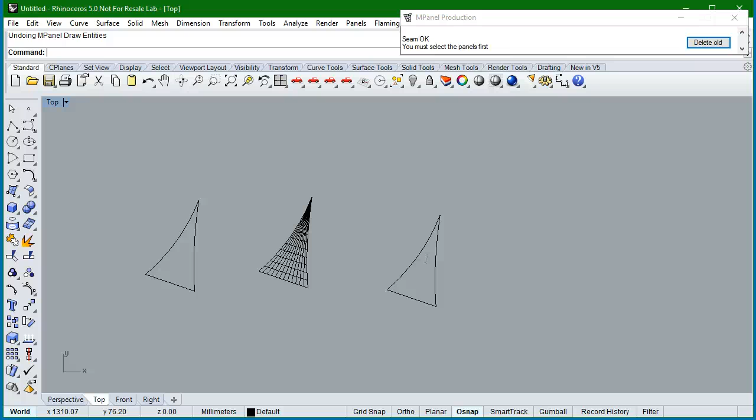This video is to look at panel truncation or seaming truncation, where the seam is truncated on the corners, and this has particular use on panels like these triangular panels which have a sharp pointy end.

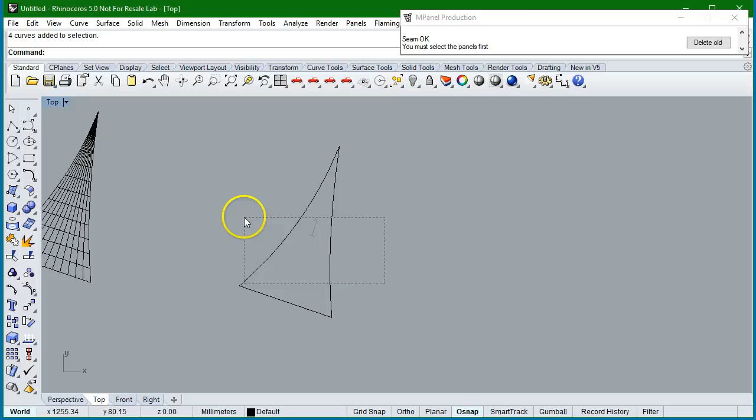If I add a seam allowance to that with no truncation, so this is just a normal seam allowance, we get an extension of the end here due to the seam allowance, which can waste fabric and can be difficult to handle in production.

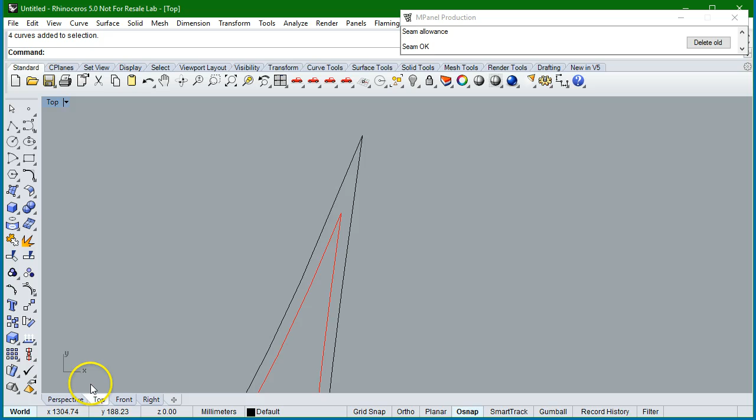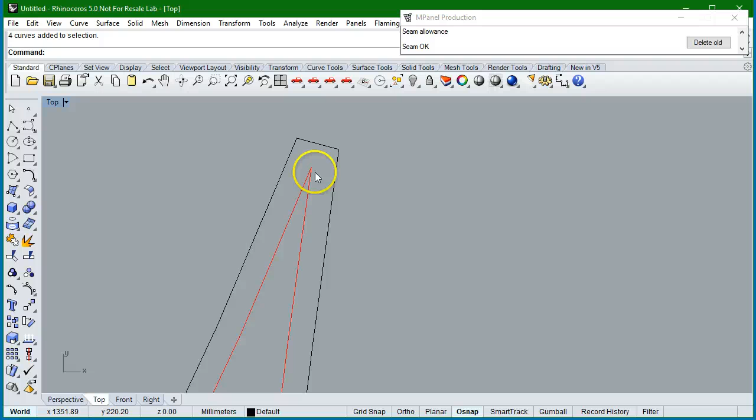If alternatively we specify that we want the corner to be truncated, so I'll use a simple truncation, then when I seam the panel, the corner is truncated off to this size of the seam allowance, and this allows for less fabric wastage.

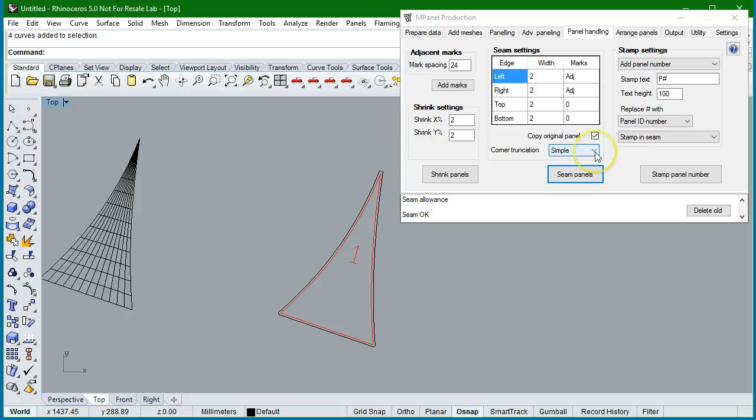The truncation, of course, is applied on all corners. Wasn't really needed perhaps on these corners, but it just gets added in on all corners. There are some additional features on the corner truncation. Instead of a simple truncation, we can do an arc or tab. And I want to just describe the use of the arc.

The arc is only used when your construction technique is to sew the panels together, where you place the panels back to back before sewing. Now, some production shops will do this, some won't, so this only applies to you if you're using back-to-back sewing.

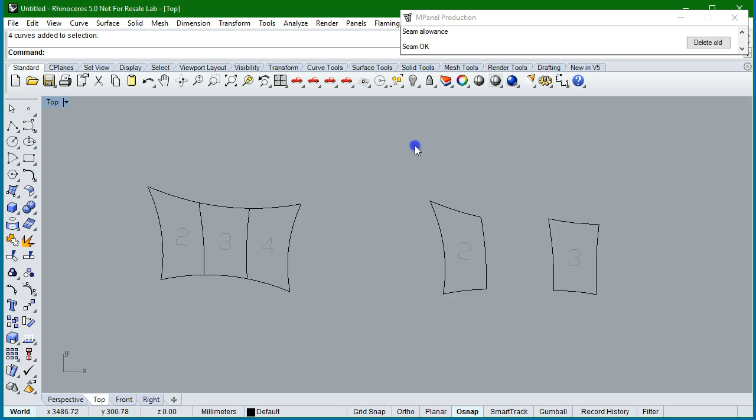I've got a set of panels here. I've taken a couple of them as an example, and I'll go ahead and specify that we're going to make an arc truncation, and we can then seam these panels.

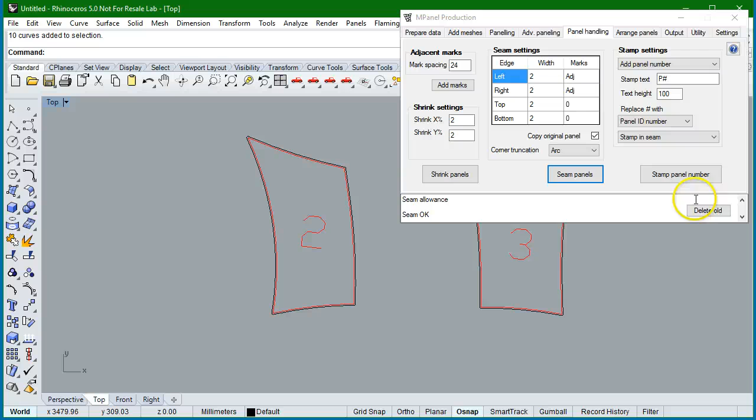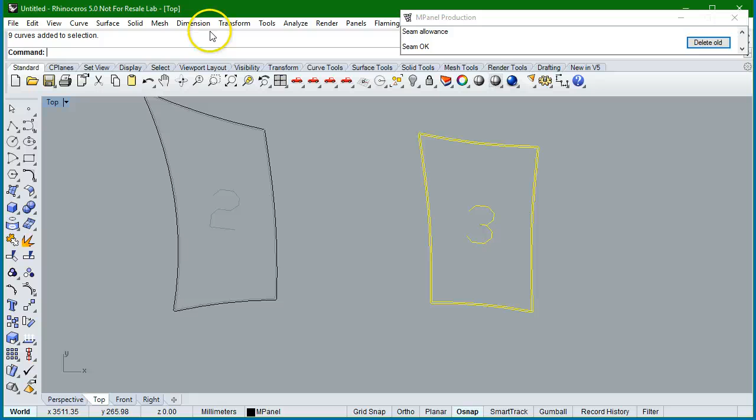In each panel corner an arc has been added which goes all the way around to be tangential to the two seams. And the reason that's useful is that if we're going to sew these together back to back, and I'm going to illustrate this by doing a mirror of this panel, and then moving the mirror to line up exactly in the corner.

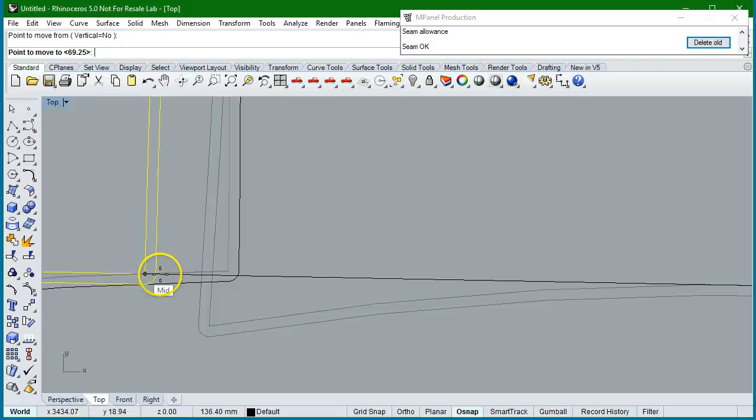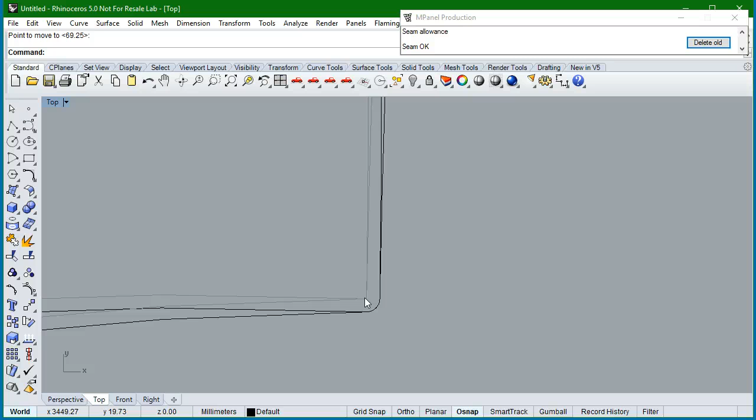So this is the starting point for your sewing, and you can see that when the panel corners line up, also the arcs line up in the corner, and that means that you can start your sewing by lining up the two corner arcs, and the true positions of the panel corners will then be lined up exactly.

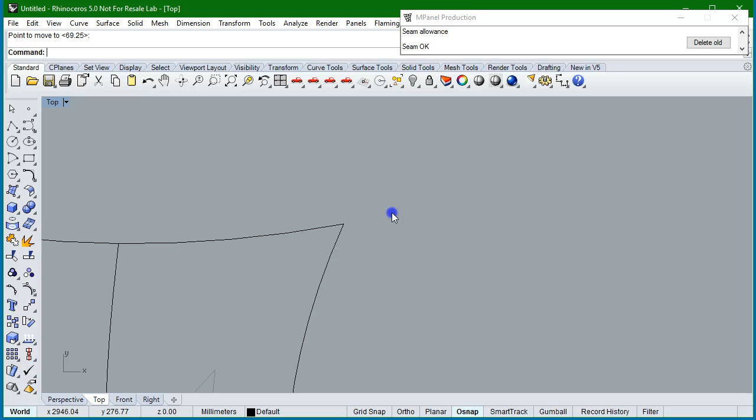There is one other option on the truncate corner, which is to create a tab. This is not often used, but it just creates a small piece of fabric which sticks out, and in some production shops that is used for the method that they use to make corners. I don't expect many people to be using that feature.

Mostly you will use just simple truncation, unless you're doing back-to-back sewing, in which case the arc is a useful additional function.